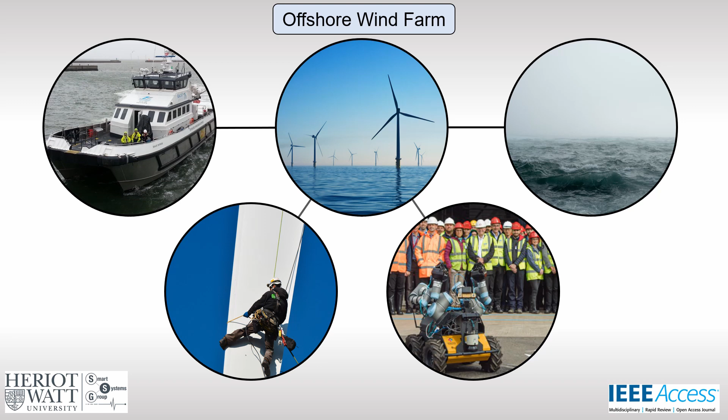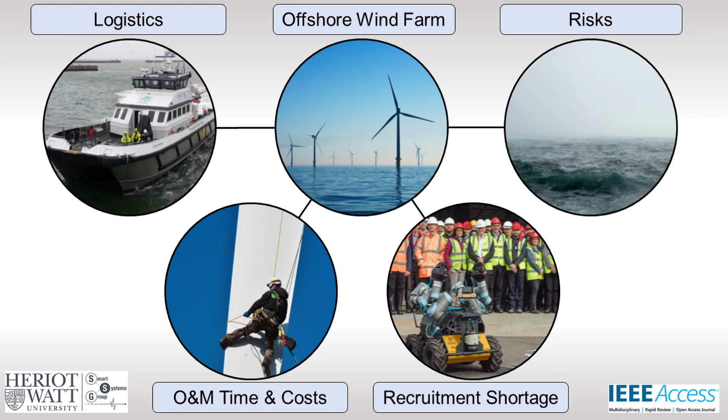The offshore wind sector faces a number of challenges in its future development. 80% of offshore costs is attributed to accessibility and transport when completing asset integrity inspections. Engineers are faced with specific transport windows due to the dynamic and rapidly changing weather conditions, which presents risks in an already challenging environment. Offshore wind turbines are being constructed further from the shoreline, increasing the difficulty, duration and costs associated with offshore inspection. Lastly, there is also a recruitment shortage in the offshore renewable energy sector at all skilled workforce levels. The value of robotics and AI can be captured industry-wide.

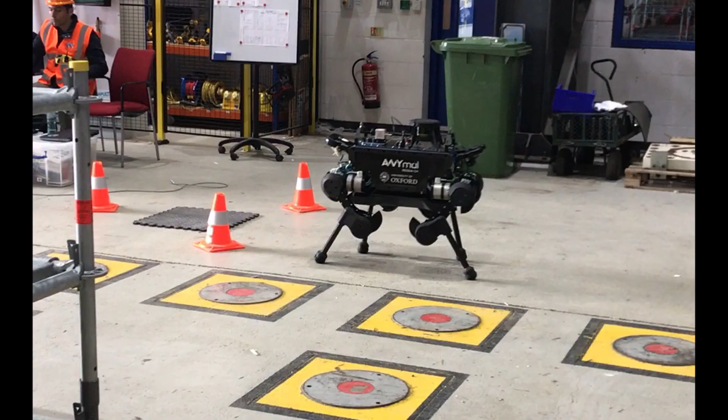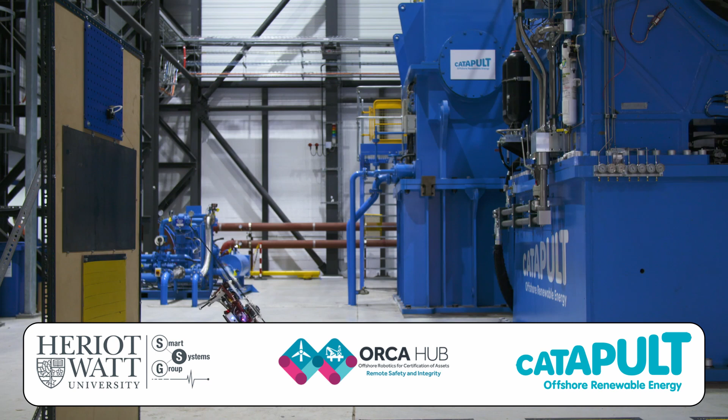Robotics and AI is a rapidly developing field which looks to tackle these challenges in the offshore environment. Several technological, regulatory and commercial barriers limit the expansion and full exploitation of robotics and AI in the offshore domain. Runtime safety and reliability of autonomous systems are key obstacles to ensure resilient, beyond visual line of sight missions. A key factor in unlocking the future potential of robotics is how a robotic platform can self-certify their systems and update human operators that they are fully operational and ready to go.

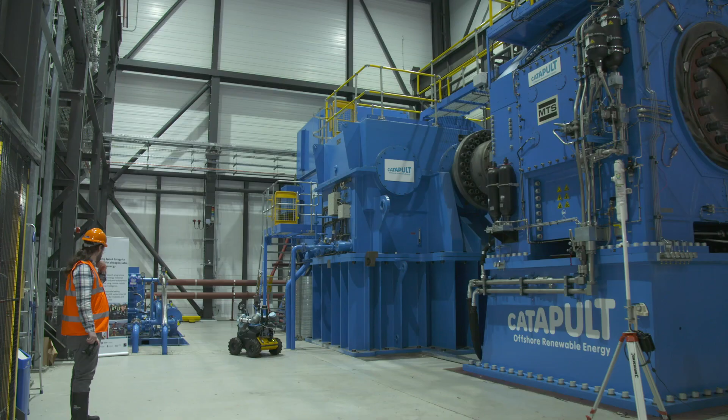The remote and dynamic environments that autonomous systems will be required to navigate often mean that it is not always possible or feasible for human operators to interact with a robotic platform during live operation. Therefore, systems require autonomous adaptive mission planning, which can take into account known and unforeseen circumstances that could influence mission success or cause safety, environmental or asset-related risks. These barriers represent a complex representation of integrated systems and engineering challenges wherein time-critical analysis is required to ensure productivity, reliability and safety governance.

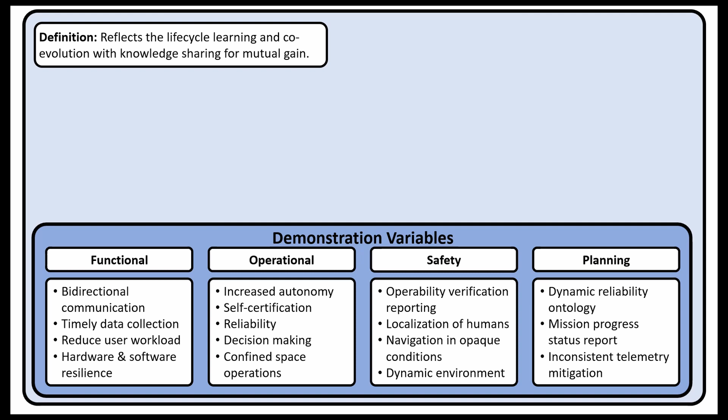Robotics and autonomous systems require a symbiotic system-of-systems approach to resilience in autonomous missions. We have defined a symbiotic system as the lifecycle learning and co-evolution with knowledge sharing for mutual gain. A system of systems is defined as a set of systems or system elements that interact to provide a unique capability that none of the other constituent systems can accomplish on its own.

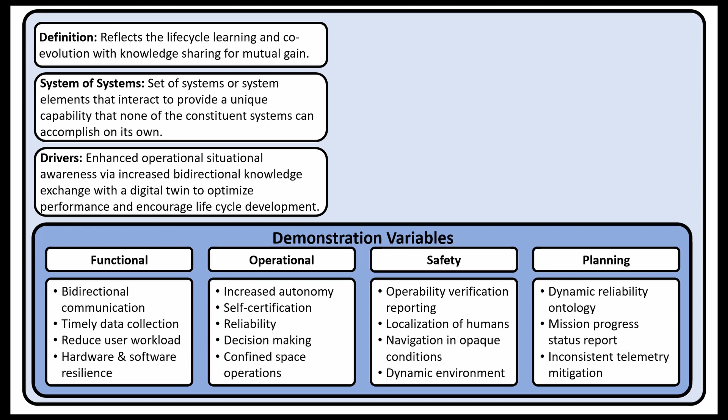This approach is driven by the view that to improve operational situational awareness via bidirectional knowledge exchange from a digital twin will optimise performance and encourage lifecycle development. This can be completed by aggregating information from across the infrastructure, environment, robot and human in the loop.

The challenges which symbiotic systems face are how to create a collaboration interface which facilitates trust from the human in the loop, in addition to providing an improved autonomous system overview to classify mission status, system certification and data sharing without overwhelming the human in the loop. The solution to this problem facilitates functionality, human trust, increased autonomy, operational resilience, and compliance certification.

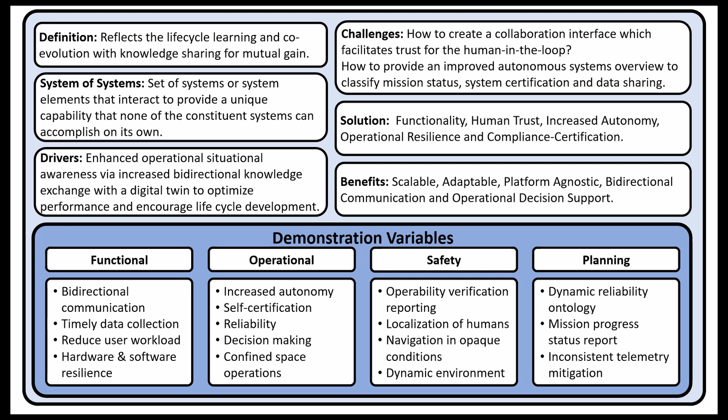We design a symbiotic system of systems using a top-down assessment of these barriers to create a framework that includes functional, operational, planning, and safety requirements of resilient autonomous missions. Our symbiotic systems of systems approach addresses the previous barriers between collaboration, cooperation, and corroboration of autonomous systems. Our approach enhances this via the integration of collaborative governance under our symbiotic digital architecture.

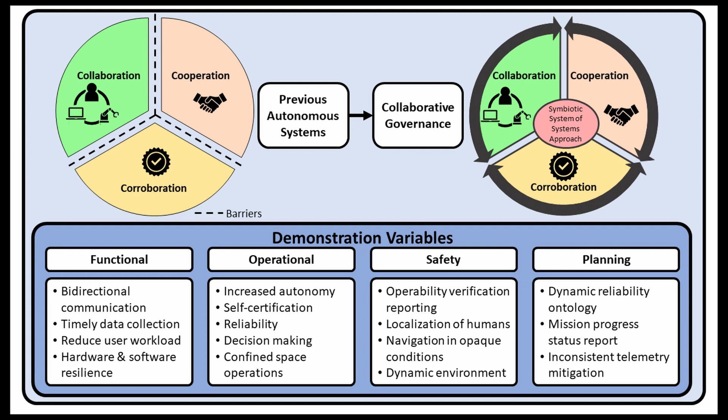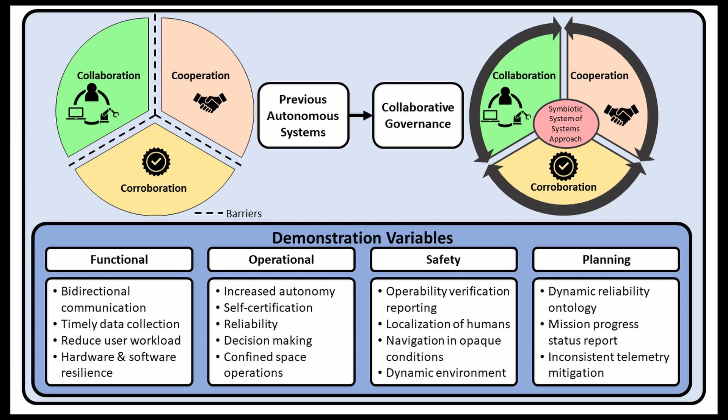This demonstration focuses on Tier 1 Adapt and Survive with a roadmap to Tier 2 Adapt and Thrive. Tier 1 represents an autonomous mission or service with predefined mission objectives, where the robot evaluates the following: the implications of a scenario from operational variables, sharing knowledge with the digital twin, and mitigating threats to mission resilience.

The symbiotic system was applied to our autonomous confined space inspection showcase using our robotic platform, Husky A200, mounted with a pair of UR5 manipulators. This required a system integration process and symbiotic digital architecture to ensure mission success.

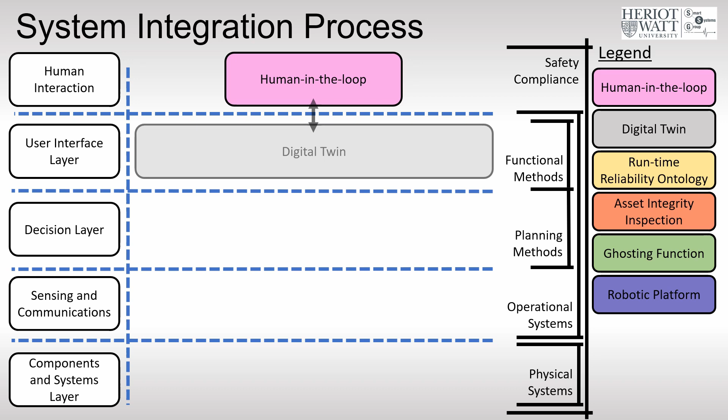The system integration process represents the features of the subcomponents of the symbiotic system. The layers display the links between all subsystems and highlight the demonstration variables which are being addressed. The human in the loop represents the human interaction layer where the operator can interact with mission components within the digital twin. The decision making is linked to the simultaneous localization and mapping stack, motion planning, and ontology.

The digital twin is connected with the FMCW sensing, which is utilised in the confined space autonomous inspection mission. The digital twin represents the user interface layer, which contains the tools and functions for the human in the loop to have an overview of any autonomous systems. The decision-making planning domain definition language layer of the runtime reliability ontology is linked to the key software systems of the robotic platform. The ontology processes diagnostic data from the internal sensors of the robotic platform.

The SLAM stack receives data from the LiDAR sensors and cameras. The motion planning calculates the commands to be sent to the mobile base and the manipulators.

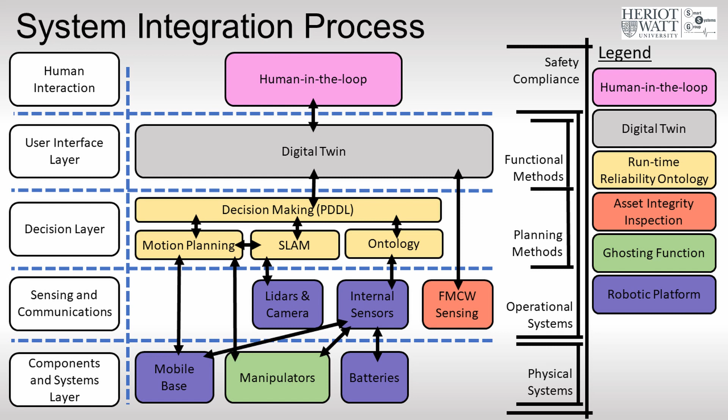To support resilient autonomous missions, we have focused on the integration of top-down requirements as well as ground-up capability challenges. For information from an autonomous robotic platform to be actionable within a time-critical context, it must be mapped into a design for resilient systems through our symbiotic digital architecture, which captures functional, operational, safety compliance, and planning requirements.

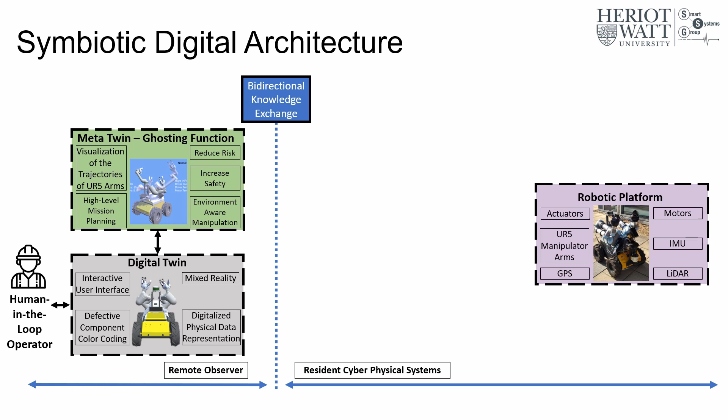Our symbiotic digital architecture commences by supporting the remote human observer, enabling access via a real-time, bidirectional, and interactive digital twin. A meta-function of the digital twin includes a ghosting function, which increases safety by reducing the risks associated with manipulation operations.

A runtime reliability ontology supports adaptive mission planning, enabling front-end resilience via runtime diagnosis, prognosis, and decision-making. Within the design of our runtime reliability ontology, we feed front-end data analysis and edge analytics into these back-end models within the digital twin.

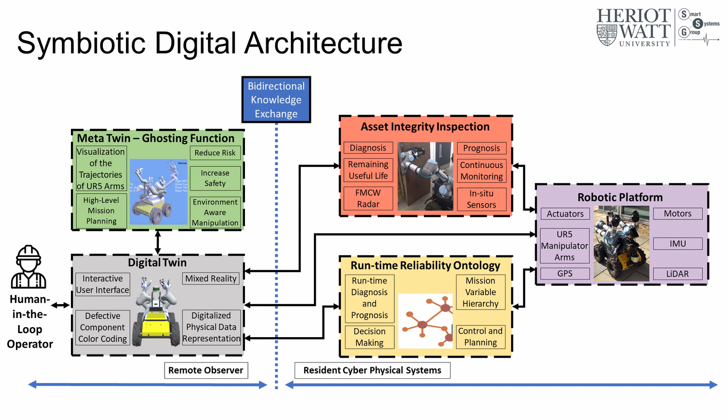To enhance situational awareness, we integrate a novel radar technology for asset integrity inspection onto the robotic platform. Frequency modulated continuous wave (FMCW) radar provides surface and subsurface asset integrity inspection, presented as the inspection overview in a 3D model.

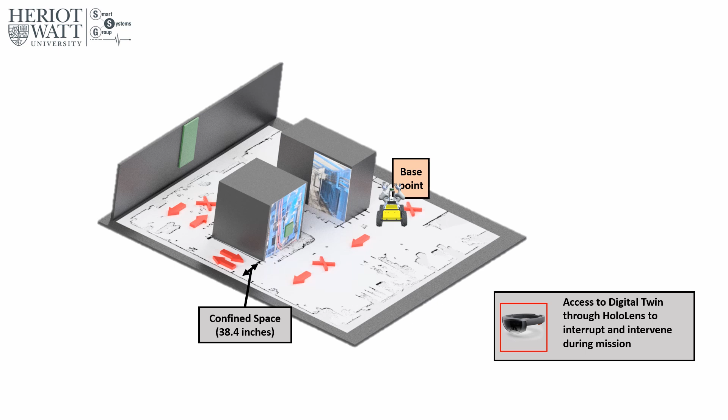Stage A represents a reconnaissance mission to map the area where the autonomous platform will be deployed, represented by the white map on the ground of the model. Stage B and C represent the mission base point and transit of the mission. The asset integrity inspection is performed at Stage D.

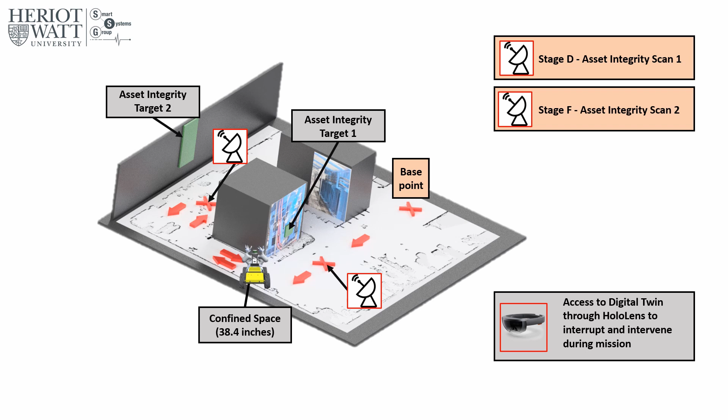Stage E represents the transit through the confined space. Stage F is where the second asset integrity scan is performed. Lastly, in Stage G, faults are induced on the robotic platform. These faults represent the motor being too hot, the software consuming too many resources, and a low battery fault.

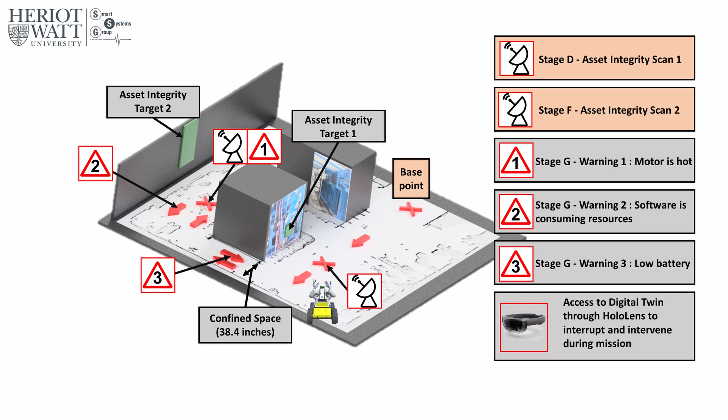When mission planning, the human operator sets out green dots for waypoints. The robotic platform optimises the route automatically upon starting the mission.

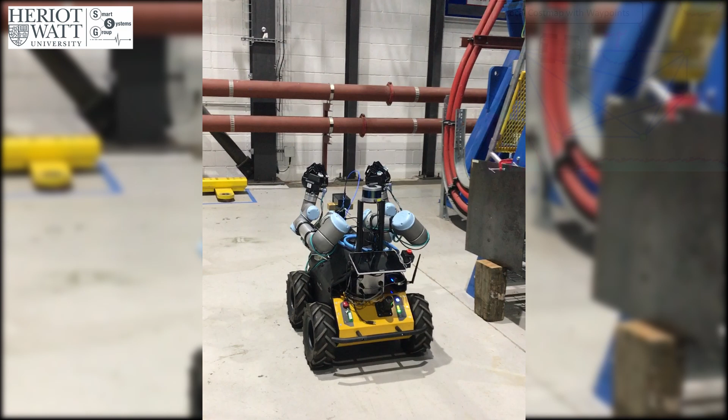Here we see the asset integrity inspection using the FMCW radar mounted on the front of the robotic platform. The non-destructive inspection is assessing for corrosion on the metal sheet.

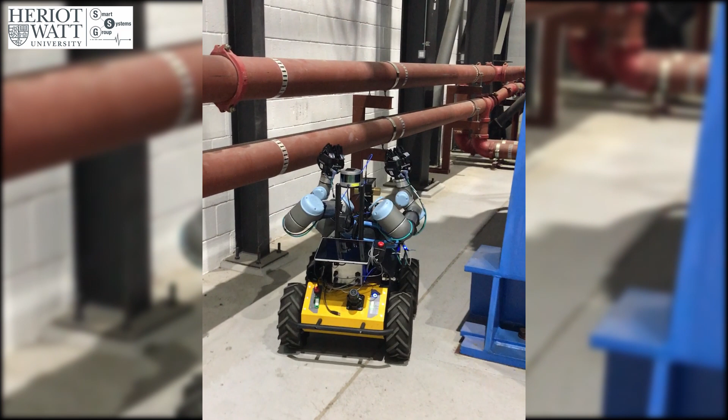Upon completion of the first asset integrity inspection, the robotic platform moves through the section of the route which is considered a confined space operation with respect to the size of the robotic platform. For this demonstration, the standard assigned proximity warnings had to be removed and replaced with narrower warnings to allow the robotic platform to enter the confined space.

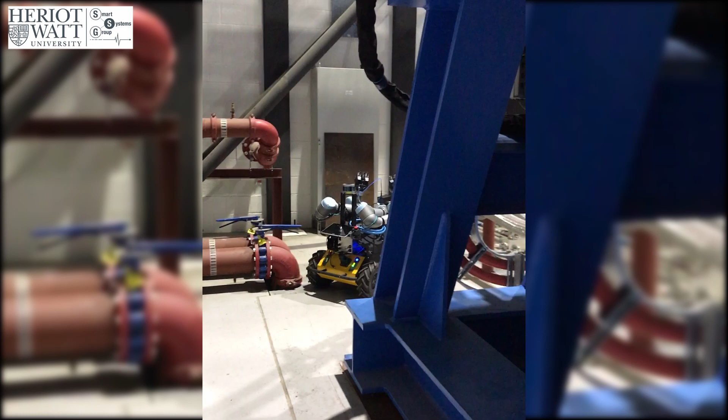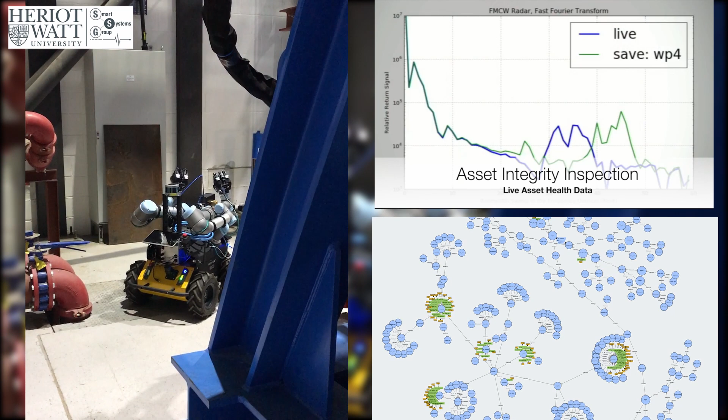The runtime reliability ontology is pictured, highlighting the complexity of the fault prognostics. The second asset integrity inspection is completed where the fast Fourier transform data collected from the FMCW radar sensor is displayed.

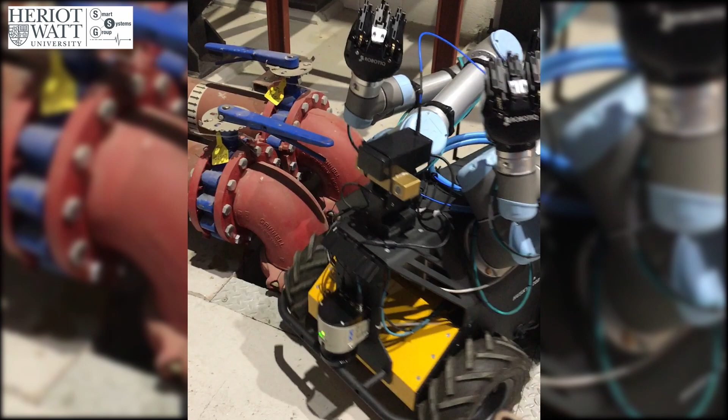The robot then returns to base where faults are induced on the platform en route, where in real time the ontology replans if mission success can be achieved after receiving each warning. The warnings include an increase in temperature of the motor, software consuming too much resources, and lastly, a low battery warning which automatically ends the mission.

The stages of the mission are represented within the displayed flowchart. The pre-mission planning requires a human operator to teleoperate the robotic platform to accurately map the area where the autonomous inspection will be taking place.

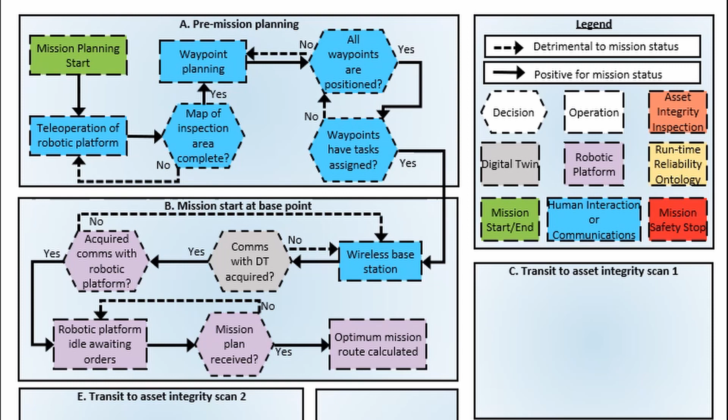With the map established, the human operator can position waypoints and assign tasks where necessary. Upon completion of the pre-planning stage, the robotic platform receives the mission from the wireless base station. The optimum mission route is then calculated by the robot.

In Stage C, the robotic platform completes its autonomous navigation until the waypoint is reached. The first asset integrity inspection is performed in Stage D, where the pan tilt unit is repositioned to face the material under test. The FMCW radar sensor is turned on to complete the number of required scans for the non-destructive evaluation of corrosion.

The data is transferred via bidirectional communications to the digital twin in real time. The autonomous navigation then repeats to the next waypoint.

For the second asset integrity inspection, the same set of instructions are performed by the robotic platform as in Stage D. The robot is programmed to return to base in Stage G. However, we induce several warnings on the robotic platform to verify the resilience of the AI-supported runtime reliability ontology of the robot. We induce a motor temperature increase where the following decisions are made by the robot.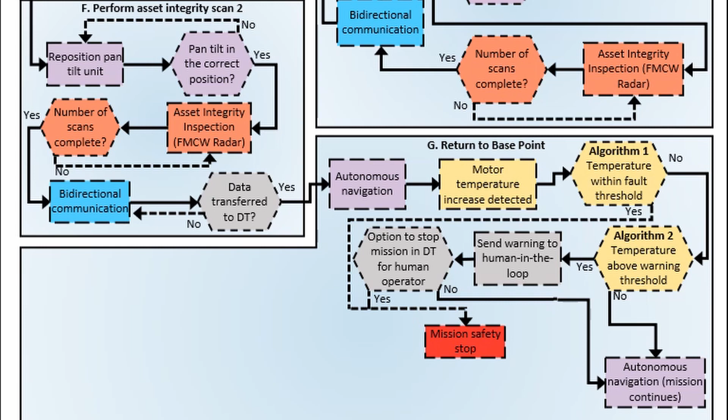First, the ontology identifies if there is a fault which requires the immediate safety stop of the mission. If not, the ontology identifies if the temperature is above the warning threshold to prompt the human operator of the potential risk. This updates the human in the loop in real time where the robot continues with the autonomous mission.

Secondly, we induce the software consuming too much of the resources. The ontology assesses if this is within the fault threshold and should make the decision to stop the mission. If not, the risk is assessed as within the warning threshold. The human in the loop is updated in real time via the digital twin about the risk where the mission continues.

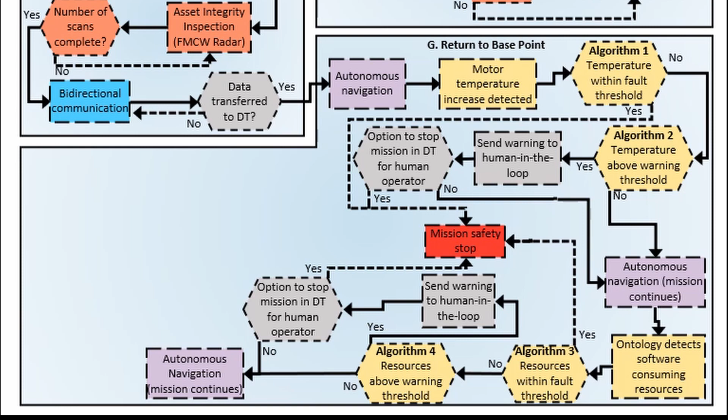The last warning in section G of the mission includes a low battery fault detected. The procedure is very similar. First, the ontology detects if the battery warning is within the fault threshold and if the mission should stop.

In our demonstration showcase, this is the decision that the ontology took. Otherwise, the robotic platform warns the human in the loop about the risk to the mission resilience via the digital twin and continues with the mission.

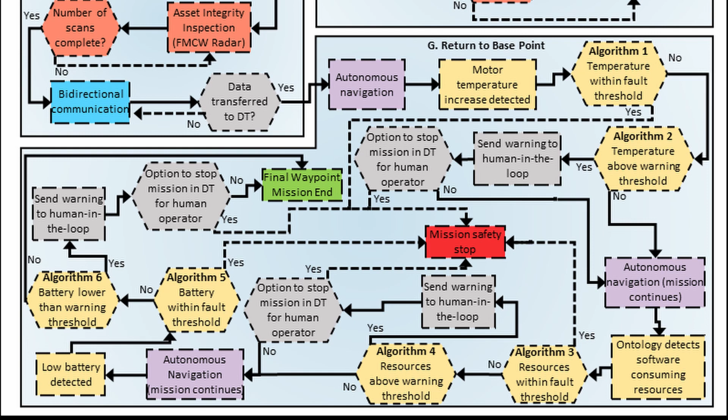Each warning displayed in the digital twin gives the human in the loop the opportunity to stop the mission during runtime. The runtime reliability ontology ensures that the autonomous system has the capability to self-certify its systems to ensure the resilience of the mission and safety of the robotic platform.

The aim of the digital twin graphical user interface is to simplify the controlling process and enhance operator safety and trust by demonstrating a virtual operational preview.

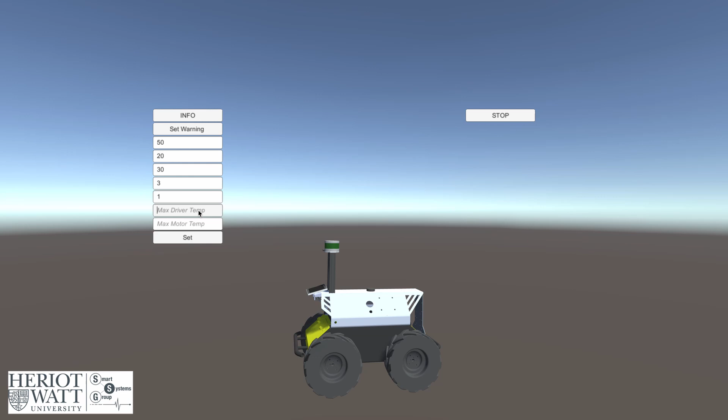We present a stage 4 digital twin, which uses simulation carried out on real-time data to predict future behaviours.

Colour-coded warnings notify the operator of the health status of components of the deployed robotic platform. Warnings can be set by the operator depending on the type of mission, ensuring the integrity of the robotic platform is maintained.

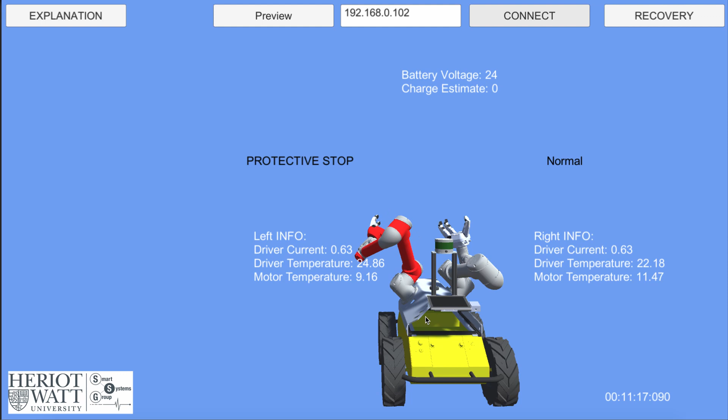The manipulator arm status is also accessible to the human in the loop via a meta function of the digital twin. The arms can be simulated where the fault status can be visualised within the synthetic environment with relevant colour coding for areas where a fault may have occurred.

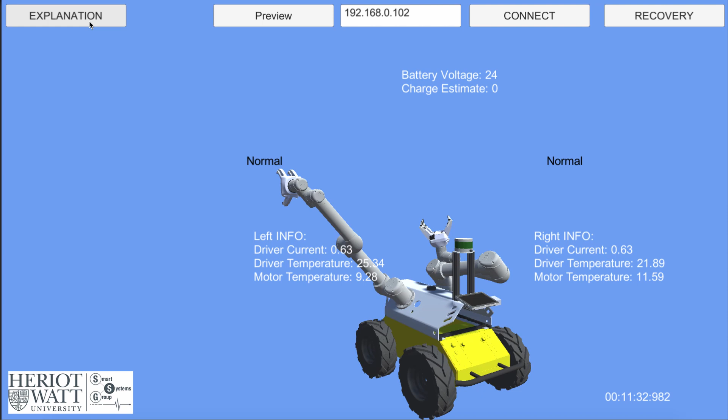Trajectories and planned positions of the arms can be visualised by the user as a translucent ghost model, allowing the operator to preview and understand the requested operation.

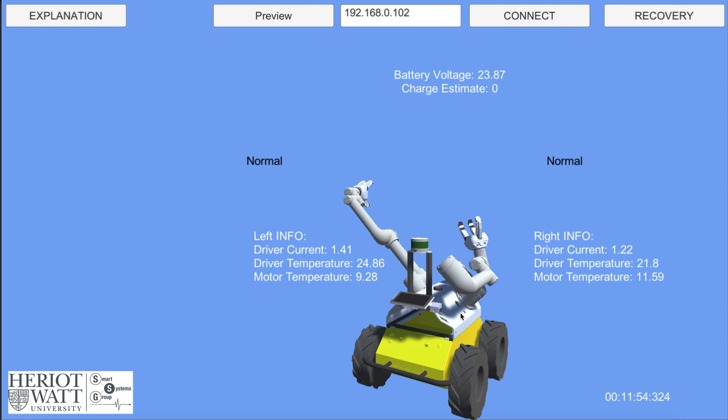This function becomes useful in the scenario of our remote observer, as the manipulator arms can be simulated before committing the program to the real-world robotic platform in the field, enabling for trust that the manipulators will act as intended.

Lastly, a motor fault is displayed in the digital twin with possible explanations for the fault on the left panel.

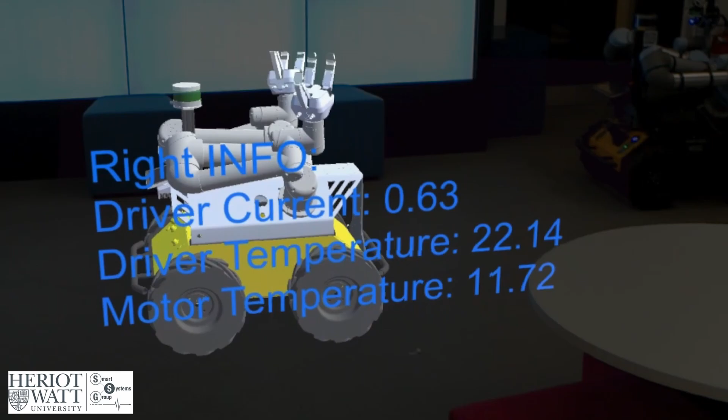A mixed reality headset can be used for remote diagnosis of faults leading to enhanced hyper-enabled situational reporting. In this demonstration, a motor fault is induced on the robotic platform.

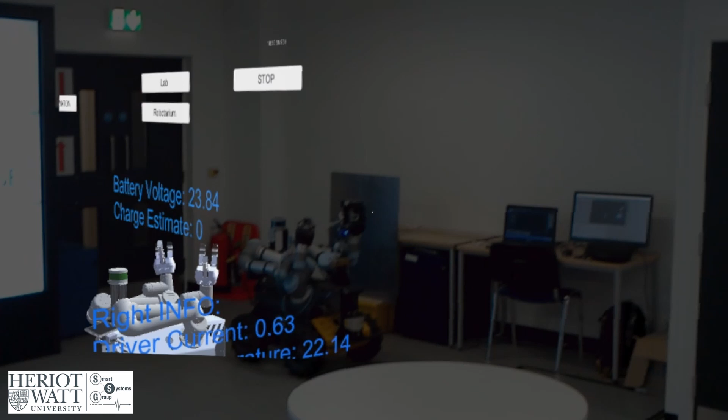Runtime diagnostic information from the robot is fed into the model, where the ontology detects the fault and converts it into actionable information for the human in the loop, accessing the digital twin.

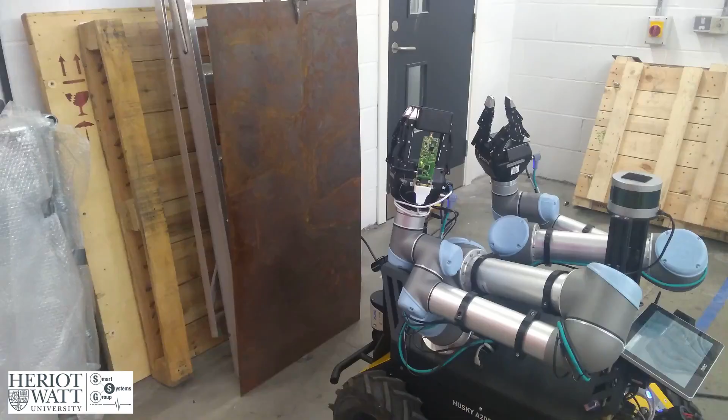Frequency modulated continuous wave radar sensing was the non-destructive test utilised for asset integrity inspection of corrosion on infrastructure within the demonstration showcase.

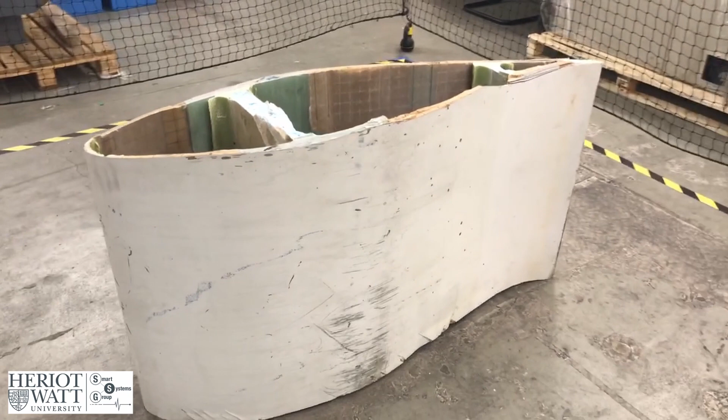The benefits of FMCW radar include lightweight, non-contact and real-time diagnosis of surface and subsurface defects.

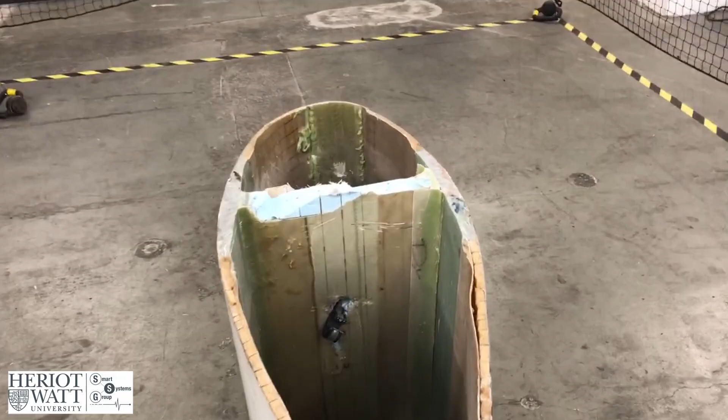The sensor was applied to a decommissioned wind turbine blade, which exhibited a Type 4 delamination defect on the internal surface of the blade. The FMCW radar sensor was applied to detect the delamination defect and 3 mL of water within the delamination to replicate water ingress.

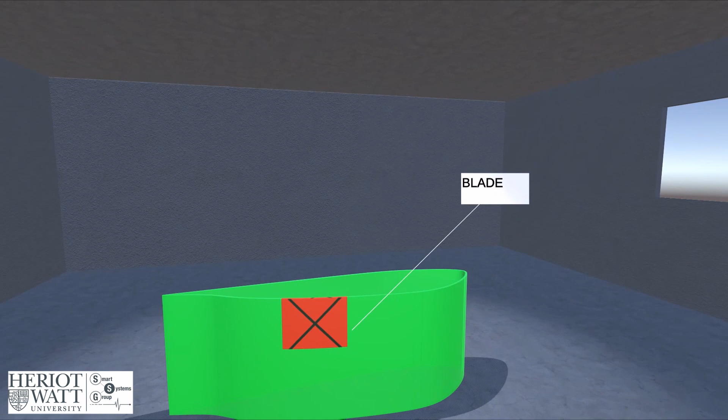The Asset Integrity Dashboard currently displays a 3D model of the decommissioned blade in an interactive, digital, synthetic environment.

Information is displayed clearly due to the colour coding of the blade, where the red hatching displays the defective area.

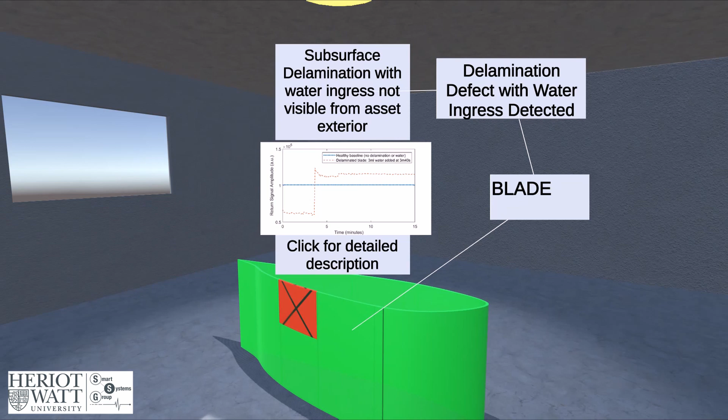A tiered level of information can be acquired by the operator about the status of a fault. Upon clicking through the tiers, the operator can view further information such as radar response and descriptions from the asset integrity inspection.

This investigation displays results from the FMCW radar sensor for a healthy section, delamination section, and the delamination with 3 ml of water included at 3 minutes and 40 seconds into the investigation.

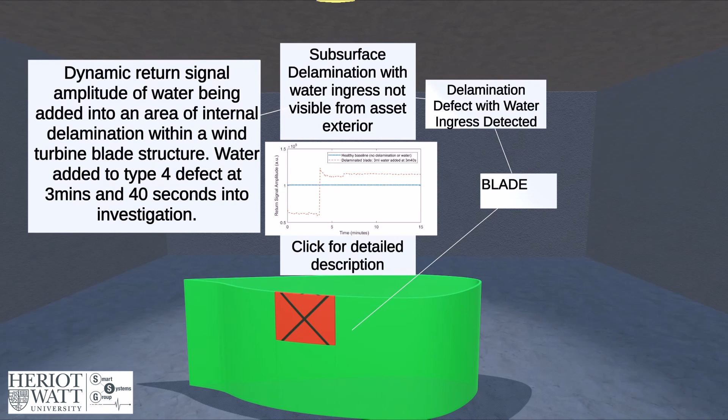The value created from the Asset Integrity Dashboard enables effective understanding of faults and evidence-based decision making, which makes sense of the complex data from the FMCW radar technology. This enables wind farm operators to better understand an overview of their wind farm and have better judgment for when remedial action is required.

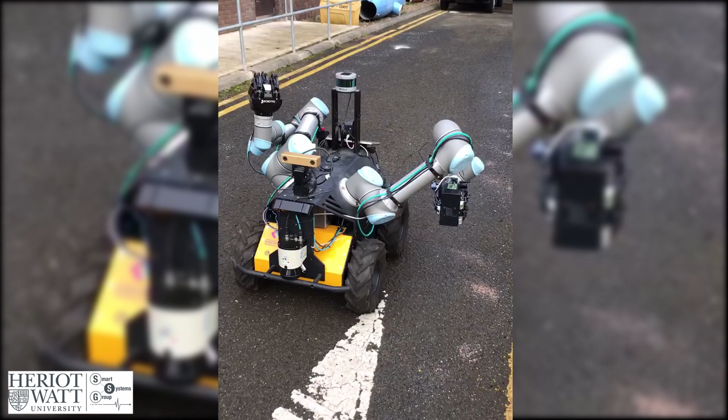Mobile systems are designed to be utilised in complex scenarios which include environments that are hazardous, opaque, GPS denied, and with restricted communications. To ensure resilient autonomous systems, accurate sensing modalities are required to ensure our adapt and survive paradigm is adhered to. The multifunction of the FMCW radar means it can be used for asset integrity inspections and also for resilient robotics by ensuring autonomous systems adhere to safety compliance.

The environment in which autonomous vehicles will be deployed inherently have risks associated with the surface of the ground. The FMCW radar sensor enables non-contact analysis of surface and waypoint conditions. This information is valuable for the safety compliance of a vehicle to prevent failure by avoiding surfaces which have oil, ice, or are unstable.

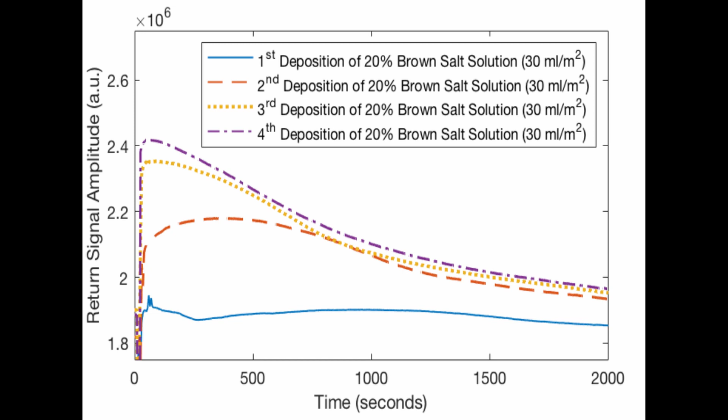The FMCW sensor was investigated for the signal response to a 20% salt brine solution on hot rolled asphalt. The salt was deposited in the sensor field of view and allowed to fully evaporate before the same volume and concentration of salt was reapplied. Subsequent applications display increased amplitude responses with clear sensitivity to the application of residual salt from the previous brine deposition.

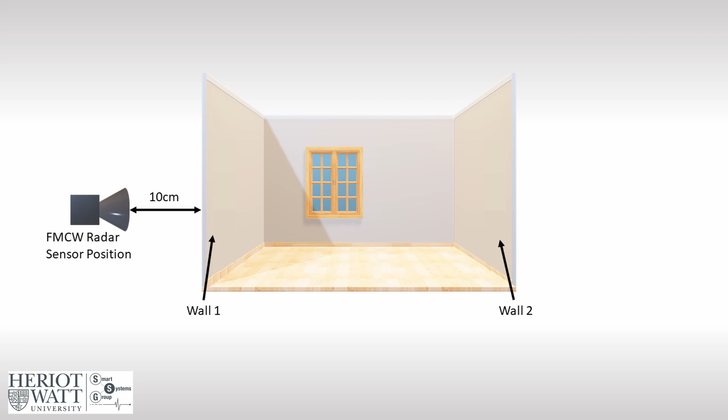The following use case demonstrates the capability of FMCW detection through walls. This initial work was conducted to assess whether the FMCW radar could be used to increase the situational awareness of a robotic platform to variables such as a human or robotic platform entering a room or mission space. This level of situational mapping promotes the safety compliance of autonomous systems when operating in constricted, high-foot traffic areas.

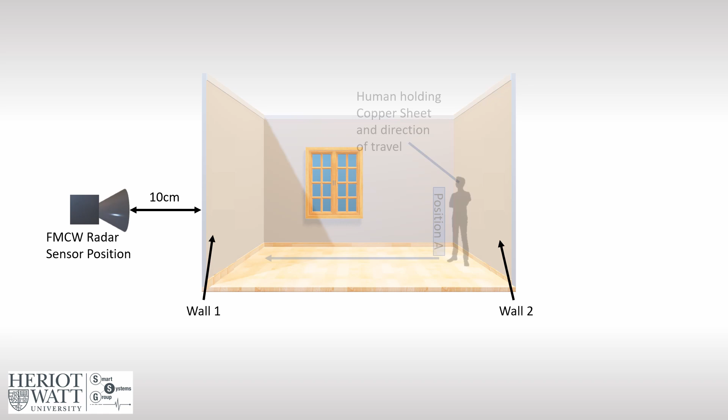The FMCW radar was positioned in the field of view of a partition wall where a 30 by 30 cm copper sheet was held by a human at position A on the other side of the wall. The human then walked towards the sensor, keeping the copper sheet in the field of view from the other side of the wall until pressed against the wall at position D.

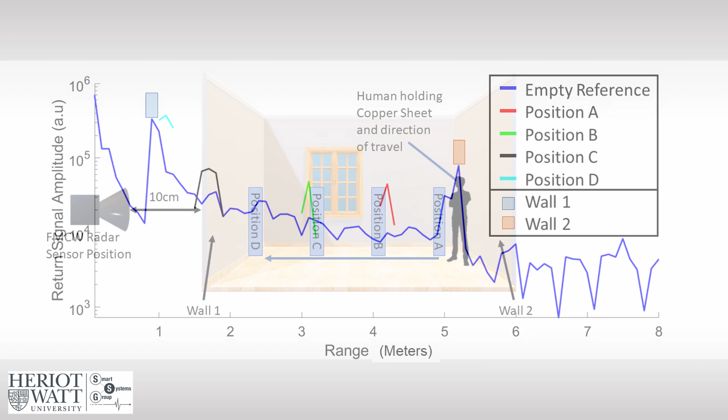The figure displays observed peaks within the return signal amplitude from the empty reference baseline, indicating where the copper sheet is detected by the radar. The red, green, black and cyan peaks indicate positions A to D respectively and demonstrate the detection of the copper sheet when moving towards the radar whilst obscured through the wall.

In achieving our symbiotic system, we designed and demonstrated the following: a runtime reliability ontology for self-certification which is platform agnostic, adaptable and scalable; a real-time digital twin which includes clarification of mission status, system certification and data sharing through bidirectional synchronization.

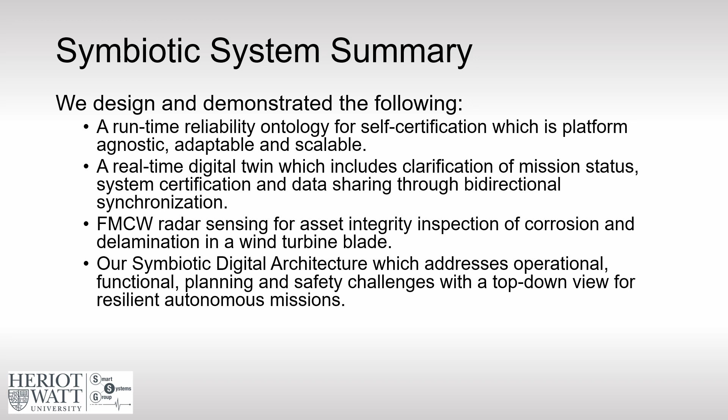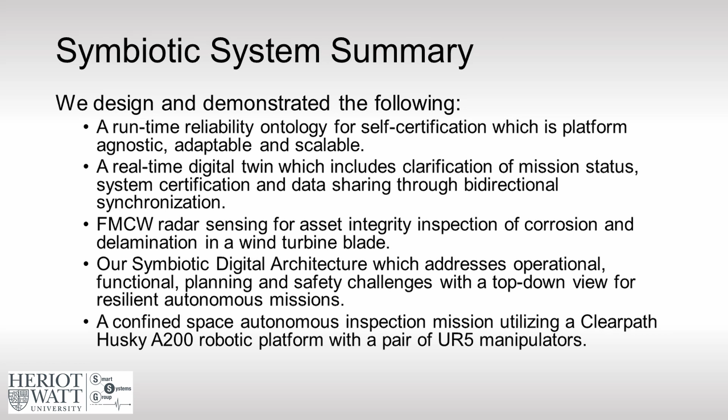FMCW radar sensing for asset integrity inspection of corrosion and delamination in a wind turbine blade; our symbiotic digital architecture which addresses operational, functional, planning and safety challenges with a top-down view for resilient autonomous missions; and lastly, a confined space autonomous inspection mission utilising a ClearPath Husky A200 robotic platform with a pair of UR5 manipulators.

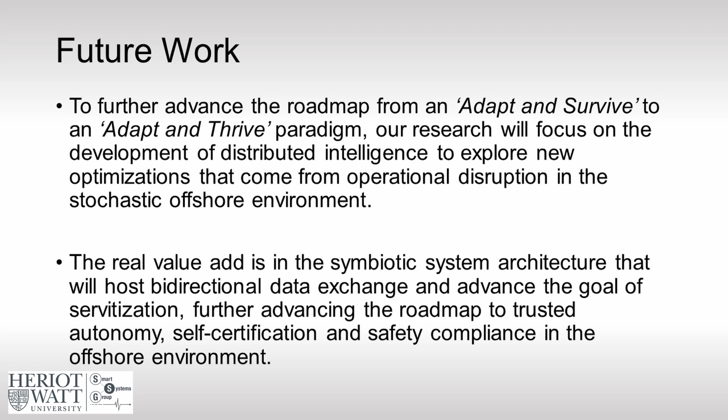To further advance the roadmap from an adapt and survive to an adapt and thrive paradigm, our research will focus on the development of distributed intelligence to explore new optimizations that come from operational disruption in the stochastic offshore environment. The real value add is in the symbiotic system architecture that will host bidirectional data exchange and advance the goal of servitization, further advancing the roadmap to trusted autonomy, self-certification and safety compliance in the offshore environment.